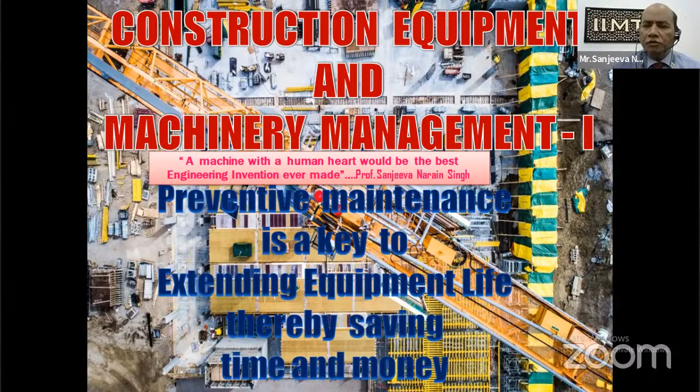Now moving to the next slide, construction equipment and machinery management. Basically when the management part of construction equipment comes into picture, the first thing that we do is planning, equipment planning. So equipment planning is a process whereby all the key equipment requirements are identified, analyzed, and proactively planned for accordingly. Selection of vendors, storage, allocation of acquired resources.

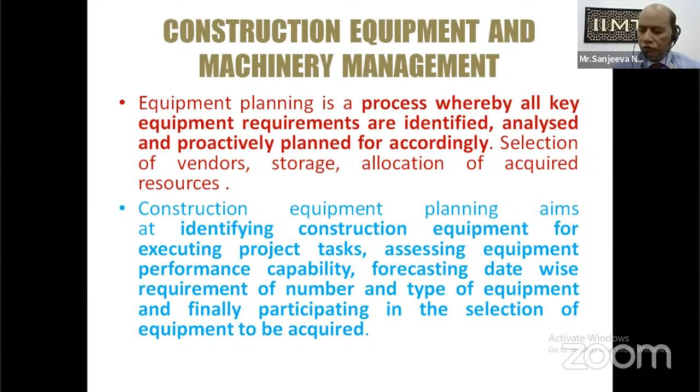So these are the components of planning and equipment and machinery for a construction project. Construction equipment planning aims at identifying construction equipment for executing project tasks, assessing equipment performance capability, forecasting date-wise requirement of number and type of equipments, and finally participating in the selection of equipment to be acquired. So while we plan for equipment and machinery on a construction project, we take care of the following issues in management.

Next, we move to equipment selection criteria in planning. While planning equipment for a construction project, how do we select it? An equipment is selected based on the quantum of civil works to be handled and its productivity requirement. If you want to complete a task within a short time, you need a heavy equipment with high speed and high RPM value, so it can handle more quantity of work in a short time. This is one of the criteria which helps us decide which equipment to select.

Learning the performance by a live demo run of the equipment. Of course, if you see a live demo of the equipment, you will be able to judge in a much better manner whether it is suitable for your work or not.

Next, construction activity frequency, type, and duration. So the activity which the machine is being used for, how frequently you will be doing that activity, what is the type of the activity, and how long that activity will happen on your project.

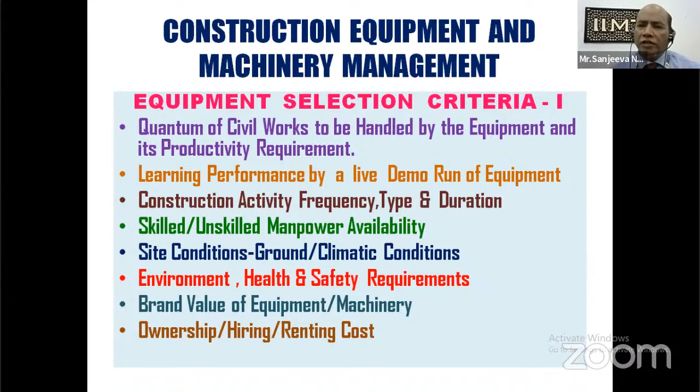Moving on to the next selection criteria: operating and operator fuel consumption cost. Operator means the driver who is going to drive the equipment. The cost of the operator, the cost of operating the equipment - that may include fuel consumption and maybe other subsidiary costs also.

Next comes fleet similarity with existing equipment and machinery. If you have equipment and machinery of a particular brand, shape, and performance, it is better to go for the same brand and similar performance in the fleet, so that all the equipment you have purchased earlier are compatible with each other while performing an activity on a project.

Next comes spare parts availability. Of course, if you purchase equipment and machinery and the spare parts are not available, then the costly equipment you have purchased, or even taken on hire and rent, your work will come to a standstill if the equipment breaks down. So you need to ensure that spare parts are available in the country or near the place where you are managing your construction project.

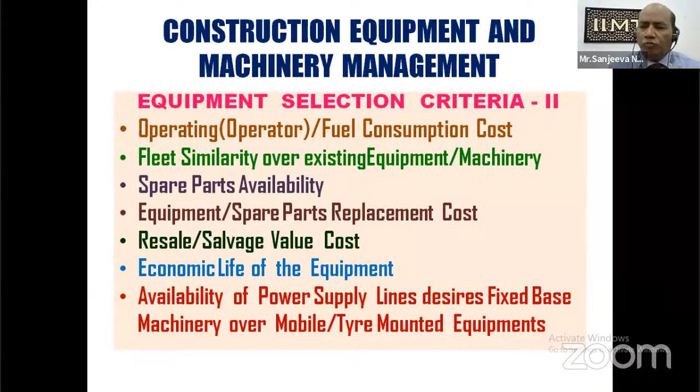Let me describe the activities for which construction equipment is available. So the first activity is excavating equipment.

There are numerous excavation equipments available worldwide. During my second lecture, I will explain in detail about the excavating equipment, the earth moving equipment, and rock breaking equipment.

Then comes the material mixing equipment. The production of concrete requires mixing of materials, so we need material mixing equipment. Then hauling, which means lifting and moving, so hauling and hoisting equipment.

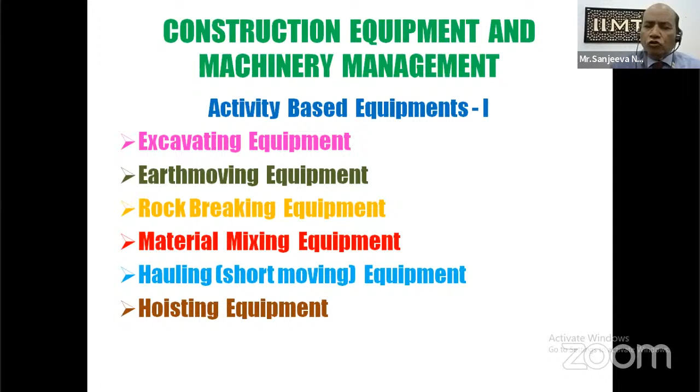Then comes conveying equipment. You need to transport the material through a conveyor belt from one place to another.

Then comes dredging equipment, used to clean the river of its silt and temporary sedimentation. Dredging equipment cleans the river and maintains the flow and discharge of the river.

Then pumping equipment, you need to pump liquid from one place to another, even at a particular height.

Then comes the compacting equipment. Compaction is one of the major activities on a construction project where you need to stabilize the soil in the foundation or in the construction of roads, airport runways, and any such places where a vehicle moves.

Then comes the drilling equipment. You need to drill in the rocks, basically in the tunneling process, to stabilize the rocks. Or when we need to hang some cladding or something, we need to drill into the rock, so drilling equipment is required.

Then comes pile driving equipment. Piling work into the ground while constructing RCC concrete piles requires making vertical holes in the ground, for which you need pile driving equipment.

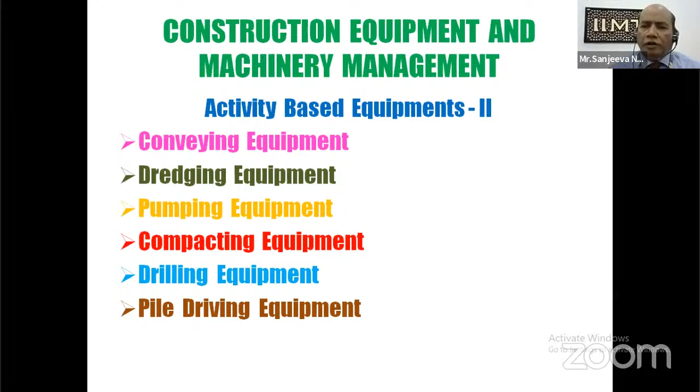Next series of activities for which equipment is required are hot mix plants. Hot mix plants are basically used in construction of roads where you heat the asphalt and mix stone aggregates of small sizes to make asphalt concrete, used for paving and smoothing the roads to make the top surface. So hot mix plant is very important machinery.

Transporting long distance equipment: you can use railway bogies, dumpers, and trucks to transport construction materials from one place to another.

Then comes material testing equipment, since you need to test the material for their suitability in construction work. Then trenching equipment, since you need to make trenches. Then tunneling equipment is also one of the most important activities for which equipment is available.

Then comes concrete production equipment. Today the batching plant has become automatic - it automatically maintains the ratio of the ingredients and produces very good quality concrete.

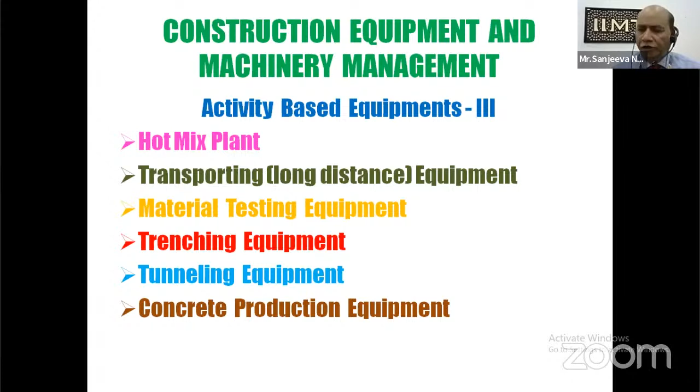Now I'd like to give you the difference between plant and machinery. Generally, machinery will have moving and working parts, but plant will not have moving and working parts, although computers and similar electronic devices are considered to be machinery despite having no moving parts. The working parts of a machine are also considered to be machinery, and plant is an asset or machine which is fixed to the ground. So that is the difference between plant and machinery.

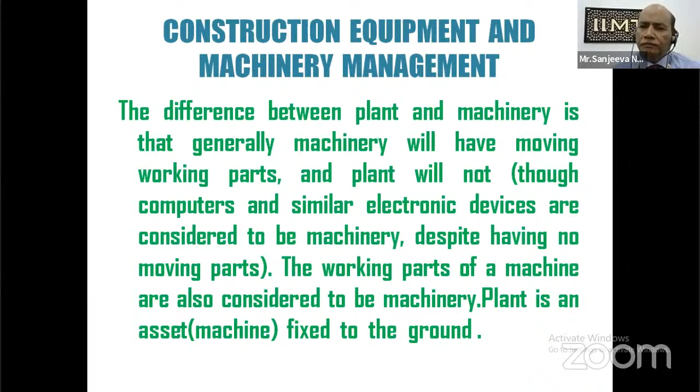Next, the choice of construction equipment for a job site is a key factor to be considered for timely completion of the project within the stipulated budget. It is crucial that construction equipment managers thoroughly understand the tasks that need to be completed, the machines that need to be used, the budget, and the time.

So to make your construction work productive, if you want your project completed within budget and within time, you need to make a careful, wise choice of construction equipment for your job site.

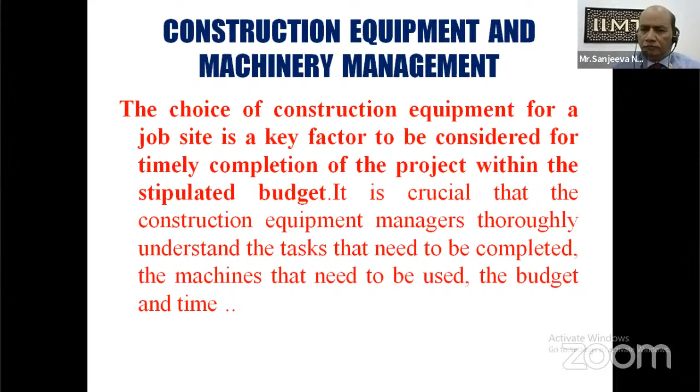Next comes equipment management systems. With the advancement of computer and software technology, equipment management systems allow you to track and manage the tools and small equipment that help your construction project succeed.

Managing equipment maintenance and expenses in a centralized software maximizes the efficiency and improves your return on investment. When you organize your machinery in a beautiful manner through software, your machinery will never remain idle - it will be productive, giving maximum productivity. It will never break down because the software will have the schedule for maintenance, repairing, and replacement of parts.

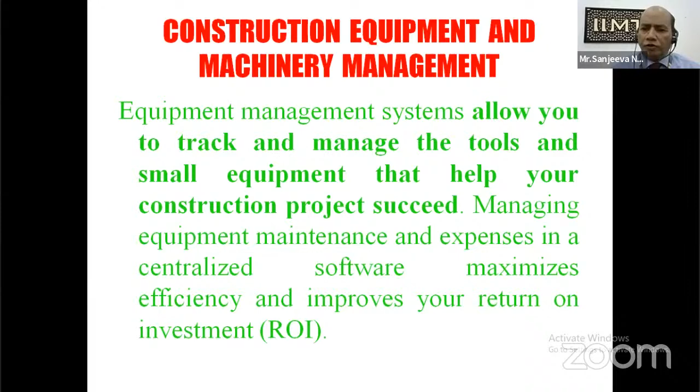Here I always take the high road - actually, I paved it. Basically, this is the construction equipment and machinery that is used on road projects.

So the dumper and the truck are hauling through a hydraulic jack, transferring the asphalt concrete to the paver. Paver is another equipment for paving the roads, maintaining, leveling the roads, and preparing the top surface.

So they say that this equipment always takes the high road because they paved it, they created that beautiful and wonderful road, that smooth road. So that is why they run on that road.

So here I give another quotation. I have designed another quotation for construction equipment and machinery, where I say that machine intelligence is the first invention that humanity will ever need to make construction projects run by robots.

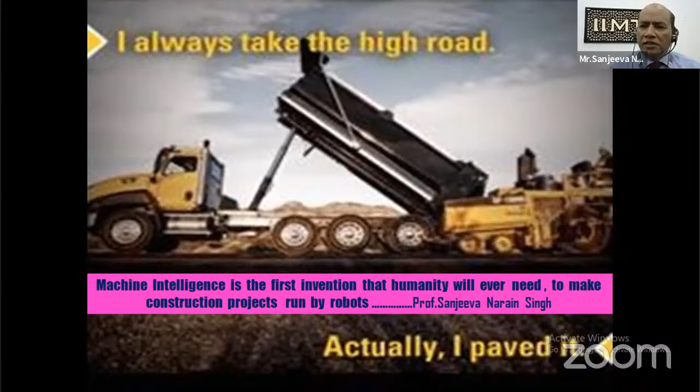Now here I explain that in the ancient times, construction machinery and equipment was not available. So in earlier times, people used to domesticate animals, and animals and carts were used for transportation of construction material.

Strong ropes were used for lifting and shifting of equipment. And when no machine equipment and machinery was available, only unskilled workers, human beings, worked, toiled hard, worked day and night on construction projects to complete the projects.

Of course, there were skilled workers. Of course, there was a method of finishing the stonework. You can see the beautiful example of Taj Mahal and many other Hindu temples where rock carvings are seen in very beautiful manner. So who worked on them? Skilled workers through small tools used to create beautiful architecture in the ancient times, in the olden days.

But I'm talking about the future. I'm talking about the future of construction equipment and machinery. So tomorrow, if machine intelligence comes into play, we can utilize the services of robots to perform repeated tasks.

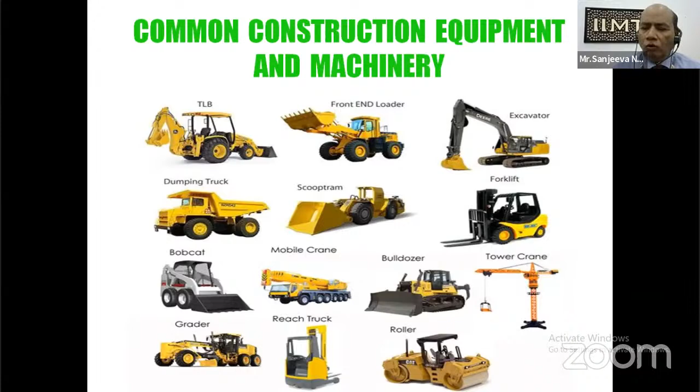Then mobile crane, a tire mounted crane we can say, which can be erected anywhere to lift heavy loads on construction sites. Then comes bulldozer. Next we have tower crane, very useful in construction of multi-story buildings. Then we have grader, mostly used in leveling of road soil. Then comes reach truck and the roller, for paving of the road.

Now next set of equipments I describe are trench digging machine, breaker machine as the second equipment, then the dumper truck used for transporting large amounts of material from one place to another, then Pokland machine or excavator used in earthwork, then roller machine, which is a vibratory roller machine that apart from rolling, vibrates the surface for better compaction.

Then mixer, or transit mixer we can also say, or truck mixer for ready mix concrete. This is a special drum mounted truck which transports concrete from one place to another.

So see, construction equipment and machinery have been very useful in the modern world to speed up construction activity and for early completion, reducing the completion time of big mega construction projects.

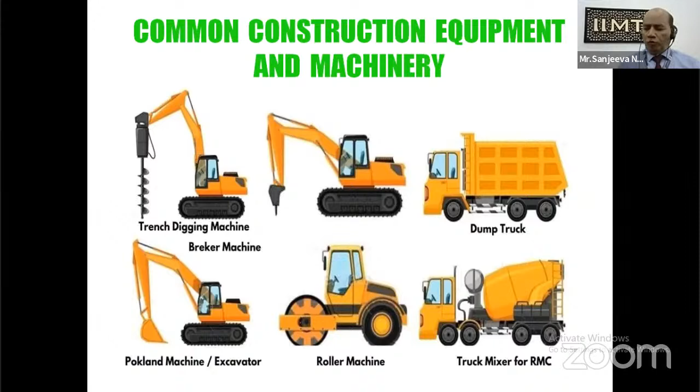From my experience, I share here with you. And last but not least, I will be continuing my lecture in the next series also.

So with this, I complete my lecture for today, and I will be available with the second part of construction equipment and machinery management in due course of time. Thank you.